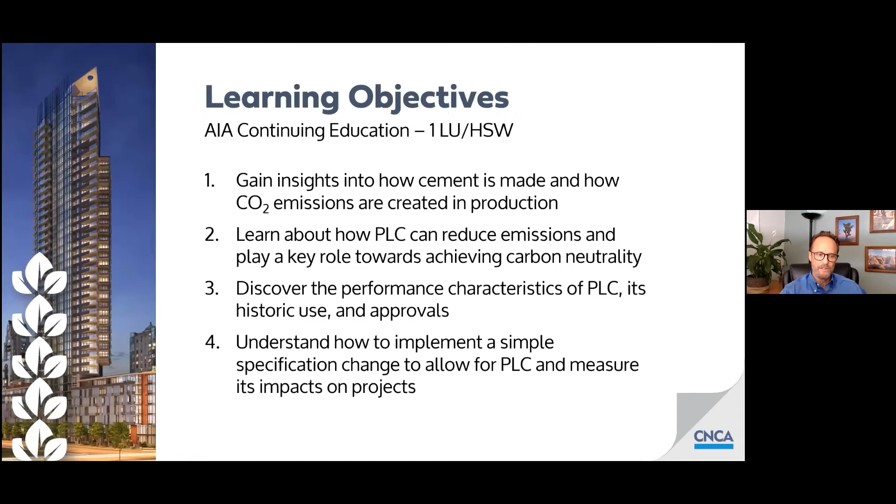Our learning objectives today were pretty well covered by Frank to start with. So we're going to go right into learning objective number 1. And this is where we'll get Nate started on how to gain insights into how cement is made and how CO2 emissions are created in production. Thank you very much, Tom.

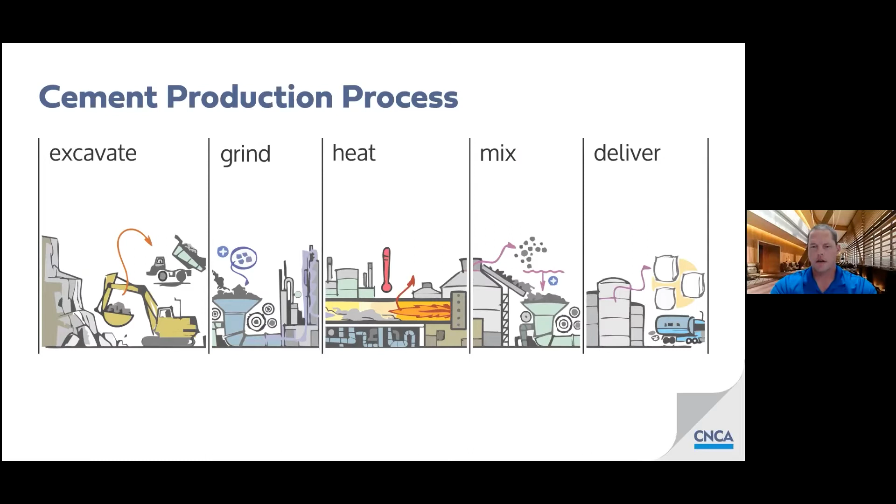What we have here is kind of a cartoon version of the production of cement, moving from left to right across the screen. We begin by excavating limestone, naturally occurring deposits in the earth, grinding that material up into a fine material, heating it up inside of a kiln to drive a chemical reaction that we'll look closer at, and then blending it with a few other ingredients at the end, and ultimately delivering it to customers for use, often in ready-mix concrete, but also in other applications, direct applications for cement.

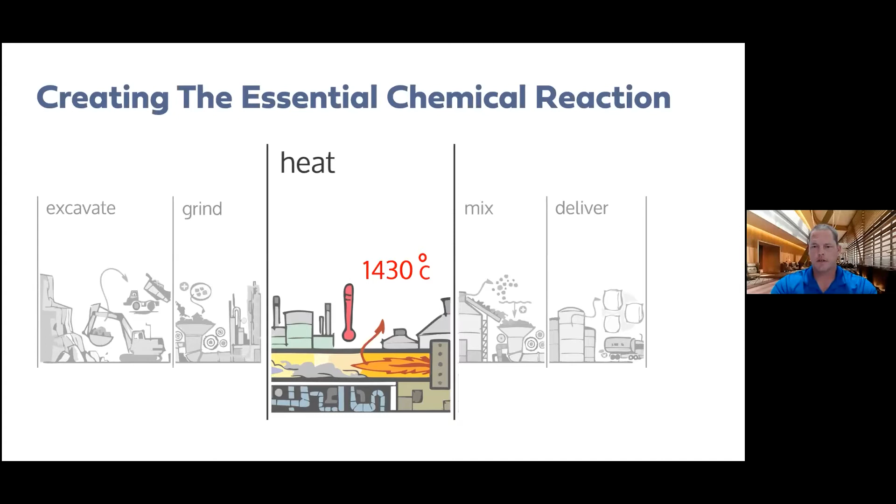This thermal process I want to focus on just for a moment, where we heat the limestone up to a relatively high temperature, 1430 degrees Celsius or 2650 degrees Fahrenheit. This takes place inside what we call a kiln, which is a steel tube about 8 feet in diameter and 150 or 200 feet long. And this is where a couple of important things happen.

You can see on the right side here, we've got a burner that's often fueled by petroleum products, natural gas, coal, petroleum coke, although increasingly agricultural waste and industrial waste products are going into that process to help us reduce our CO2.

The other thing that happens inside of a kiln is that the limestone material and a few other ingredients as well, iron and clay and things like this, get heated up in what's called a calcining reaction. That's where we take limestone or calcium carbonate, CaCO3 in the chemical equation at the top, and by heating it, we drive off carbon dioxide and we're left with calcium oxide, the prime constituent in cement, about 65% by weight. So that process, the chemical process, releases about 61% of the CO2 emissions that we associate with cement production. And the fuel, the burner, accounts for only 39% of the emissions.

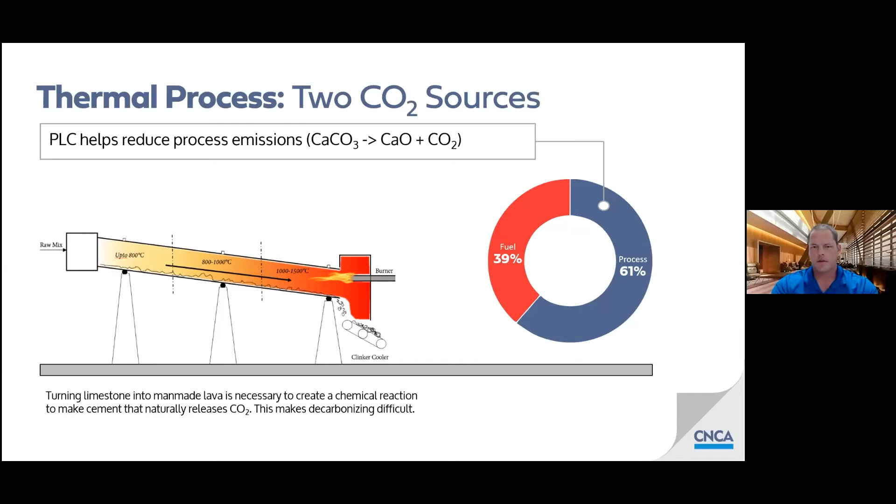So just wanted to set that record there so we all have an understanding of what we're talking about in this process.

After we make cement, typically for an architectural application, we mix it with water, with air, with fine and coarse aggregates to make concrete. And that's where the majority of the cement goes that gets made here in California.

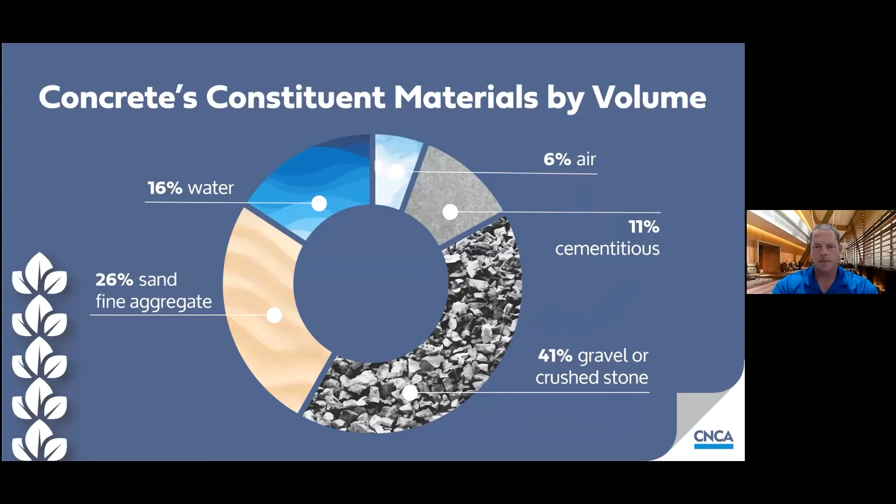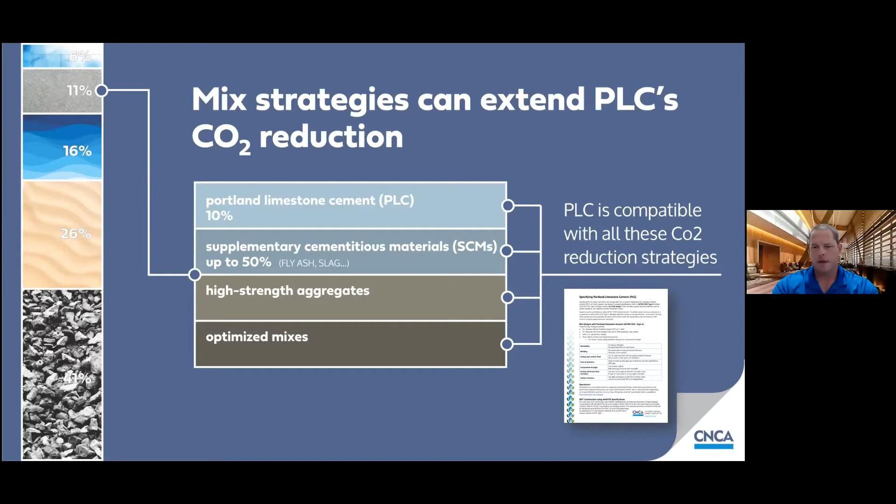When we make Portland limestone cement, we take that up roughly 11% by volume that concrete is. We combine it with the other ingredients that make concrete, but all of the practices and strategies we can use to reduce CO2 in our concrete mixes, like using supplementary cementitious materials like fly ash, slag, or natural pozzolans, using high strength aggregates that may be imported in some places, using higher strength concretes to optimize our mixes and reduce the total amount of concrete needed, all of those things still work with Portland limestone cement. We're just reducing the amount of carbon associated with the actual cement by about 10%, which then cascades into the concrete because the cement is responsible for about 85% of the CO2 emissions associated with concrete.

Here we have an example of a concrete mix design that was produced with ASTM C595 cement, which is Type IL, Portland limestone cement, the main topic of our discussion today. This one happens to be a Green Book mix. You can see by the designation, 565C3250P. What that stands for is 565 pounds of cement, a C, using their ABCDE system for aggregate gradation, 3,250 PSI compressive strength at 28 days, and the P means this is a pumpable mix. So what they've got here, just like the description says, is 565 pounds, in this case of Portland limestone cement.

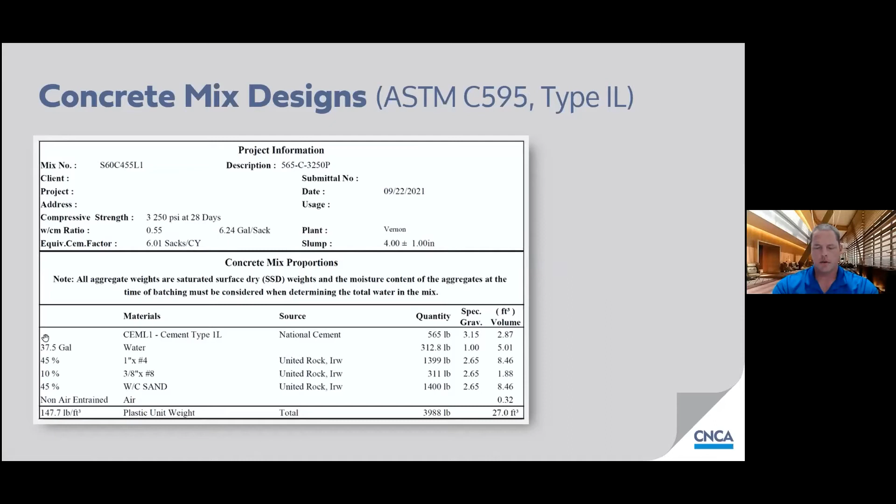To get this C gradation, they use 3 different sizes of rock: a 1 inch by number 4 blend, a 3/8 inch by number 8 blend, and washed concrete sand. And of course we have some water, we have some air. This particular mix doesn't have any supplementary cementitious materials in it, but it produces nice concrete, 3,250 PSI at 28 days, 4-inch slump. This kind of concrete mix is kind of the bread and butter of concrete producers in our area. I wouldn't describe it as particularly high performance other than by its use of Type IL or Portland limestone cement being a strategy, a tool used in this case to reduce the greenhouse gases for this particular concrete.

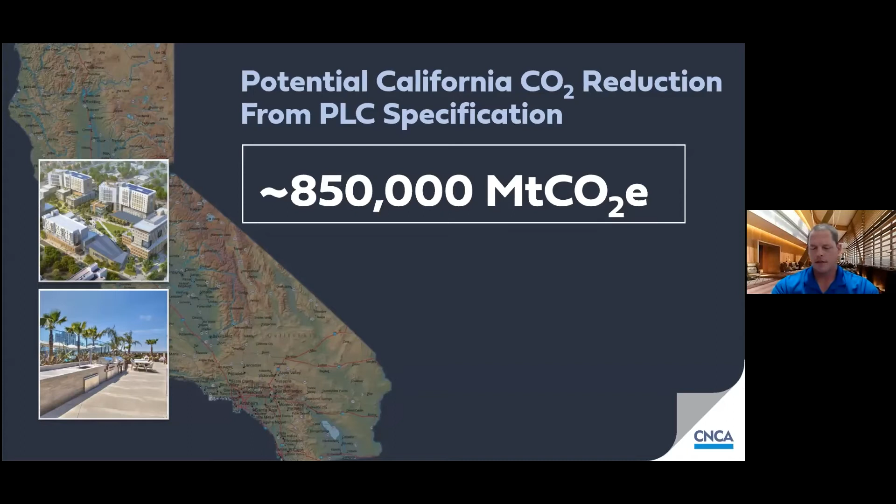If we can be successful in transforming our market from ordinary Portland cement to a Portland limestone cement, we could be potentially saving 850,000 metric tons of carbon dioxide equivalent per year in California. That is roughly equivalent to taking over 2 billion passenger vehicle miles driven every year off of the roads. That's the kind of order of magnitude we're talking about by affecting this change.

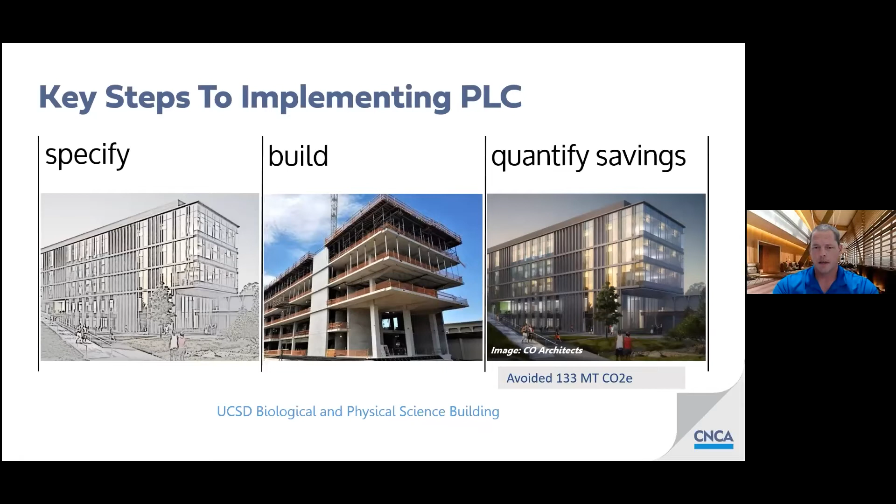Ultimately, what we want to be able to describe is how to specify this material, how to build with this material, and how to quantify the savings achieved with this material. Just like was done on this University of California, San Diego Biological and Physical Sciences building, where they saved 133 tons of carbon dioxide just by changing the cement that they specified. Up next for learning objective number 2, Tom's going to talk about reducing CO2 emissions.

Thank you, Nate. This is really where we start getting to the heart of the matter. If you think about concrete, it is a material that we trust our lives to every day. Think about being in the Bay Area as an example. If you're riding in the BART under the bay, if you're driving on a bridge over the bay, if you're looking at what's happening with foundations, particularly with things like liquefying soils for earthquakes, there's a lot of creative solutions happening there. Our entire water supply and treatment and flood control, all these things at some point relate to concrete. And like was mentioned earlier, it's used in so many places. Yet while it's so vital to our lives, there is an impact on embodied carbon that relates directly to the objectives that so many of you, I'm sure, are working for firms that are committed to Architecture 2030.

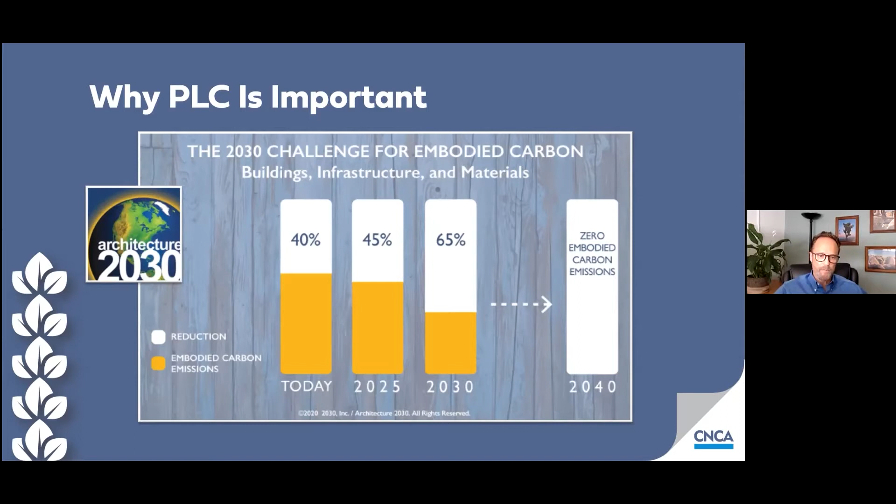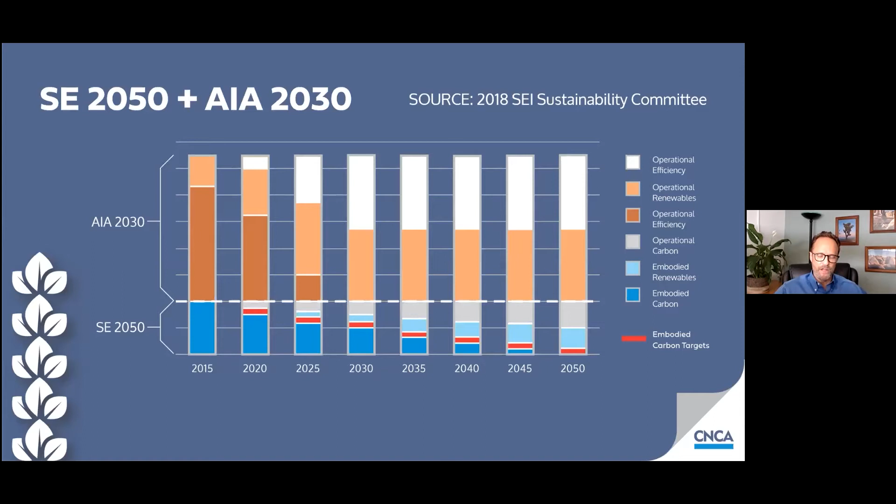You can see that the goals for reducing embodied carbon are getting bolder and more aggressive. This has also caught the attention of the structural engineers community, and we're encouraged to see that they are aligning with these goals. This chart shows how the AIA, Architecture 2030 and SE 2050 are working together to address these areas of operational and embodied carbon.

It's not just the built environment and architectural community that cares about this. The state of California is in the lead, as you'd expect. The state reached its goal of getting to 1990 levels of greenhouse gas emissions by 2020, and now by law is focusing on an aggressive goal to get to 40% below 1990 levels by 2030, with carbon neutrality and net negative starting after 2045.

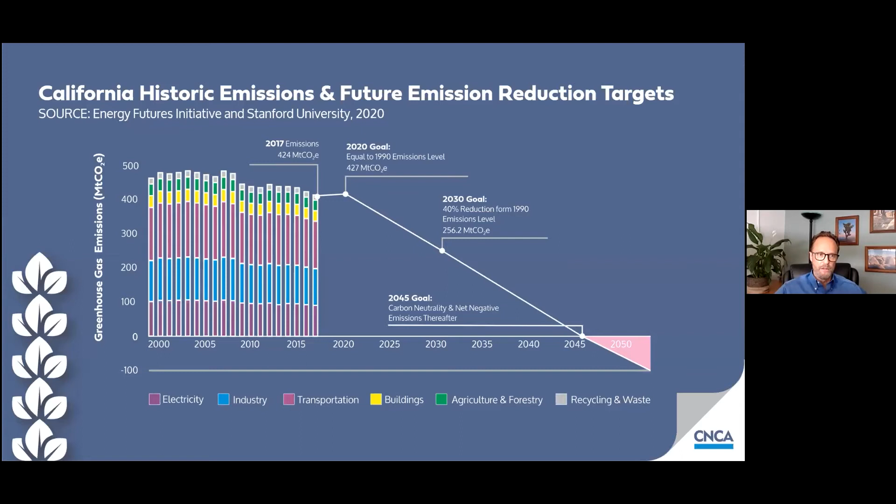We realize the cement industry is an important part of this. If we look at where we fit in terms of contributing greenhouse gas emissions in the state of California, you can see in the upper left-hand corner that the cement industry contributes 1.8% of the state's greenhouse gas emissions. That's why we're part of the California Air Resources Board's target industries for reductions. You may look at this chart and see buildings at 8.7%, and wonder about other materials we compete with, such as steel or timber.

Those materials are largely imported into the states, and even concrete. You don't see concrete on this list because, as Nate mentioned, about 85% of the CO2 impact is related specifically to cement. And that's where Portland Limestone Cement can start making a difference.

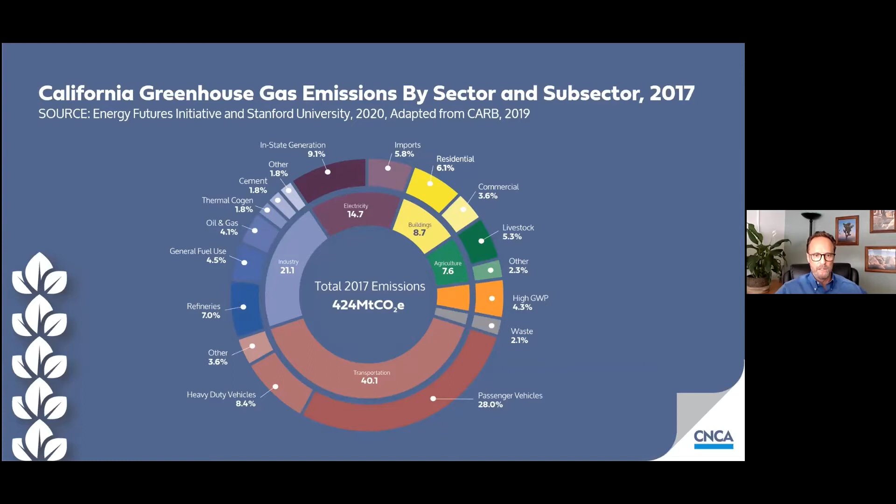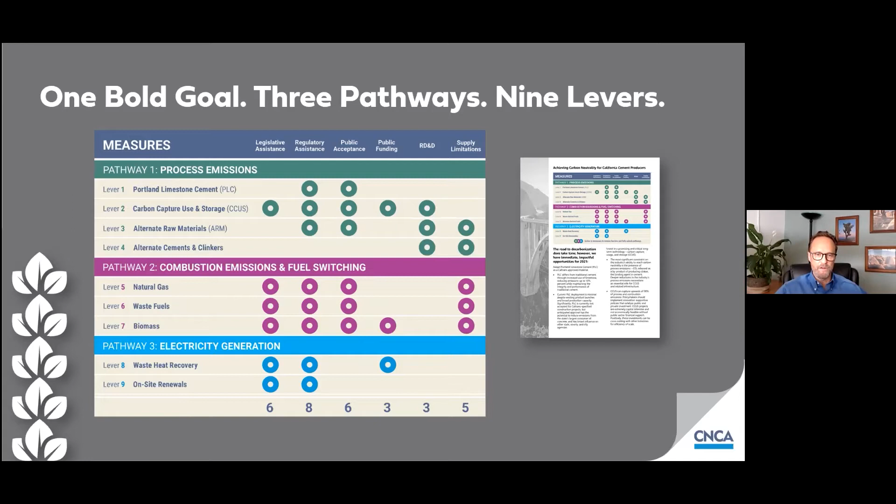This is, again, where you are a pivotal part of this progress. We really want to start a movement that's already begun, and accelerate as much as we can to move away from the traditional Portland cement typically specified on all your projects, and to inspire all of you to allow blended cements on future projects that include Portland Limestone Cement and others. This is a simple change, and I'll show you how to make it at the end of this presentation.

But a lot of this depends on demand. A cement manufacturer needs to respond to demand in order to change the way it creates its product. So this is, again, where you play a pivotal part.

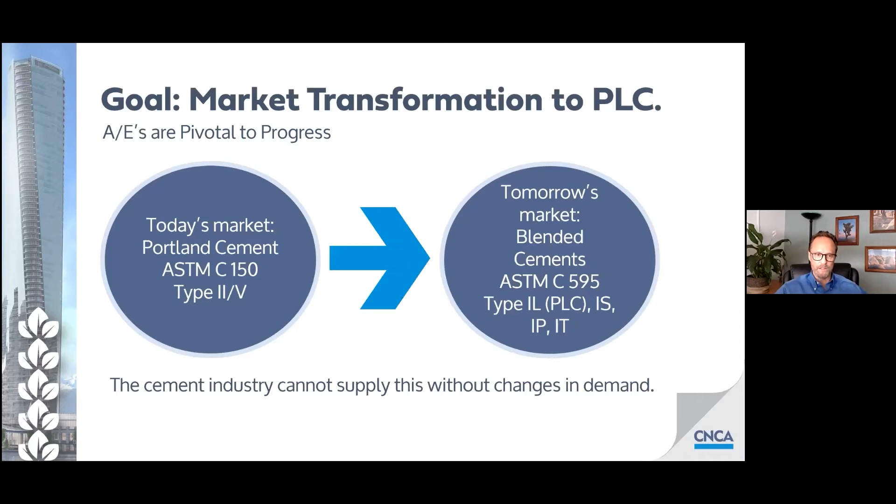I also wanted to mention something we're very proud of, and tip my hat to AIA California, because as I get your emails and look at your website, it's very apparent the chapter is closely aligned with looking at legislative issues. In this last legislative session, our association was very involved in shaping a landmark piece of legislation to decarbonize the cement industry. It's called SB 596, the first bill in any California sector to focus specifically on achieving net zero emissions. We're pleased that much of this aligns with our carbon neutrality plan.

Now this is where you get to put your seatbelt on and go back to school a little bit. This is where Nate will show you the sort of information he really gets into when talking to structural engineers. The majority of presentations we give like this are focused on structural engineers, because we realize how pivotal they are and how you look to them to make changes like this to the projects you're working on. So Nate, it's back to you. That's right, Tom.

We want to make sure that everybody has access to the information they need to make these decisions. When you, as a design professional, decide that there's a need and a willing owner to reduce greenhouse gases in their buildings, we want to make sure that the engineers you're working with know about this material and are comfortable with it, so you don't hit roadblocks when you go to implement it.

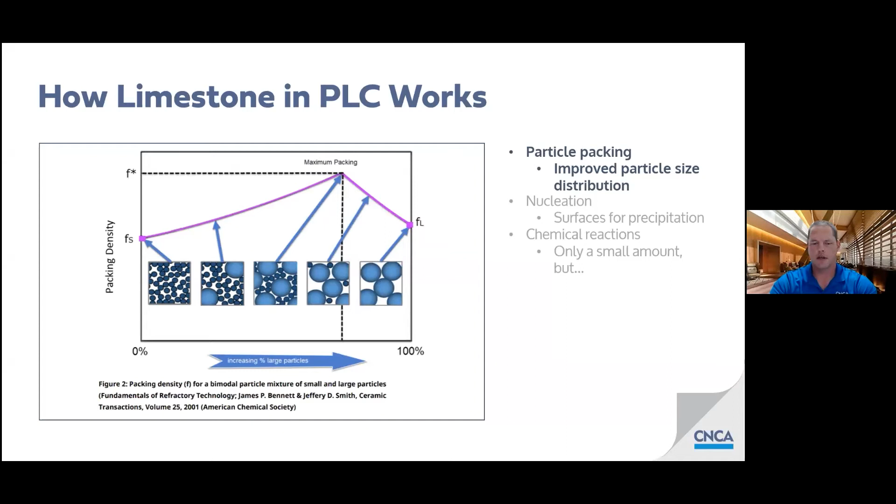Additionally, we create more nucleation sites for the formation of the calcium silicate hydrate crystals that are the product of the pozzolanic and hydraulic action of the cement. This enables the reaction to take place. It begins at more places, and the crystals don't have to bridge as far between cement grains because these limestone particles are in between them.

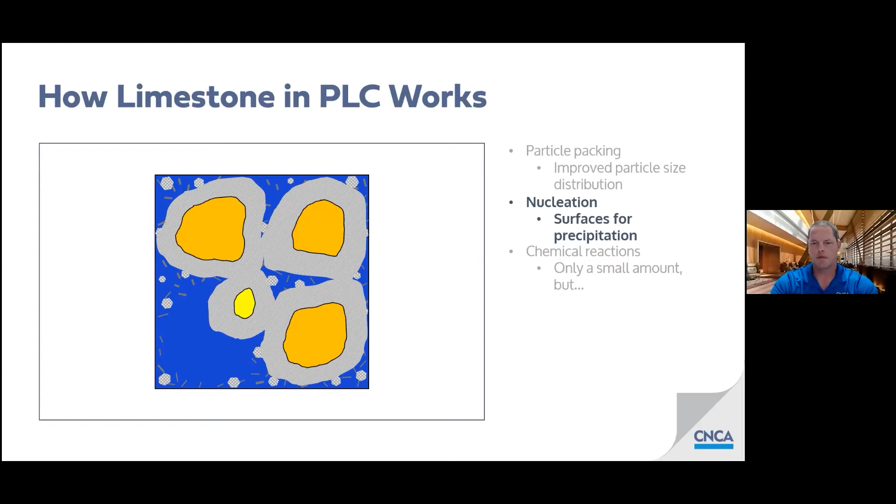And then finally, we have a chemical reaction that takes place, particularly when we have slag cement, and also in some instances with fly ash supplementary cementitious material, where we get a product called carboaluminates. As we'll see in some slides coming up, oftentimes the presence of these supplementary cementitious materials in beneficial harmony with Portland limestone cement results in concrete that's even stronger.

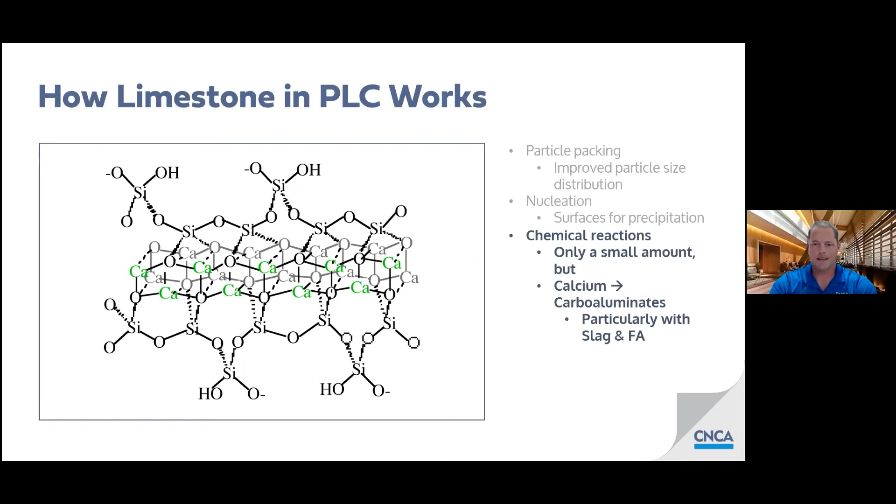We have a series of PDFs here that explain some of how this works and what to expect. As we're talking, Tom is going to upload a PDF into the chat window that you can download—about 4 or 5 pages of PDFs about Portland limestone cement.

But the general theme here is that this is being intentionally formulated to be a one-to-one replacement for ordinary Portland cement. You should not expect major changes in terms of workability, surface finishability, setting time, strength gain, compressive strength, freeze-thaw resistance, sulfate resistance, et cetera.

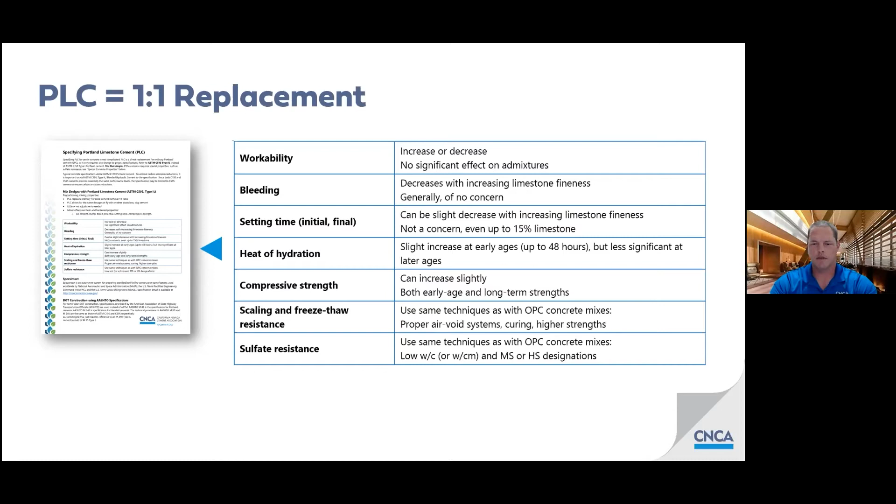We could go into great detail where I could pull out some really exciting graphs, charts, and quotes from different academic studies comparing ordinary Portland cement to Portland limestone cement in all of these properties. We can do that if you'd like, but we're not going to do that today. I'm only going to put up a few graphs comparing the two.

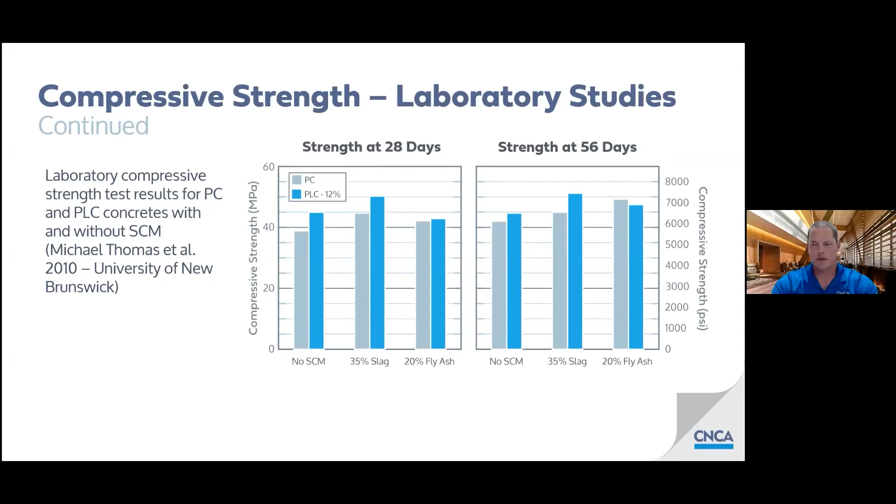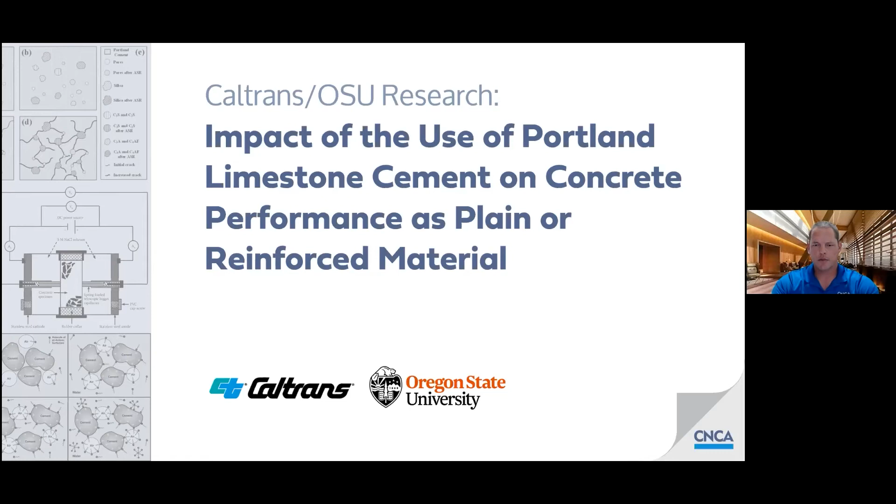More recently, Caltrans undertook an extensive research project in conjunction with Oregon State University to look at how the implementation of Portland limestone cement in Caltrans specifications would impact a lot of the work that they do. This was a pretty large project where they imported lots of materials from California—cements, Portland limestone cements, limestone powder, supplementary cementitious materials, aggregates, etc.

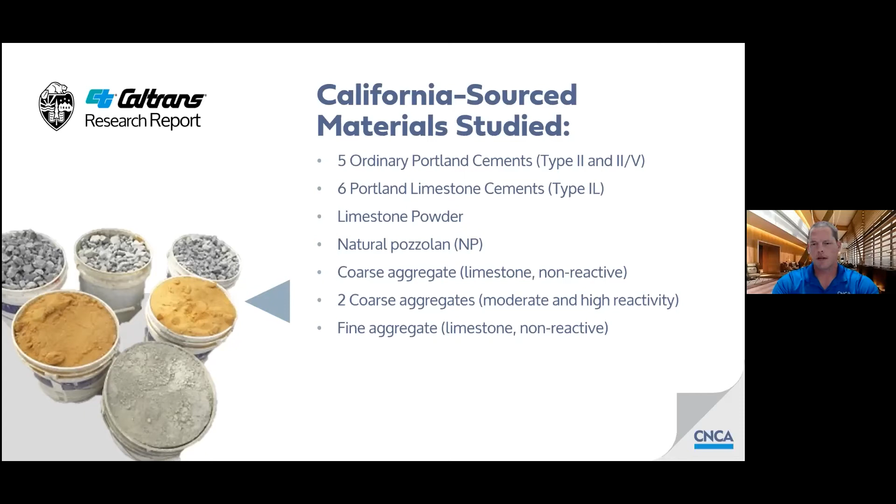All these materials were imported from California sources, made by California producers, and ultimately batched into concrete that would serve a Caltrans specific mix design for a pavement or for a structure, as an example. So this is very applicable, the information in this study, to what we're doing in California, both in public works type projects as well as buildings.

Many topics here were studied in particular in this study, 321 pages of excruciating academic detail on all of these various topics concerning the comparison of ordinary Portland cement and Portland limestone cement. We could talk about this study for hours. You could probably read it for days. It's certain to cure your insomnia, but I'd be happy to share it with anybody interested in reading it for themselves.

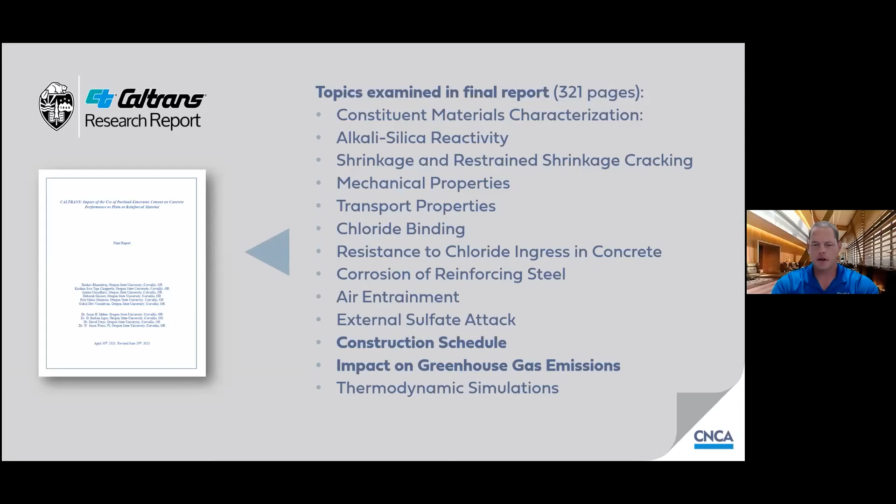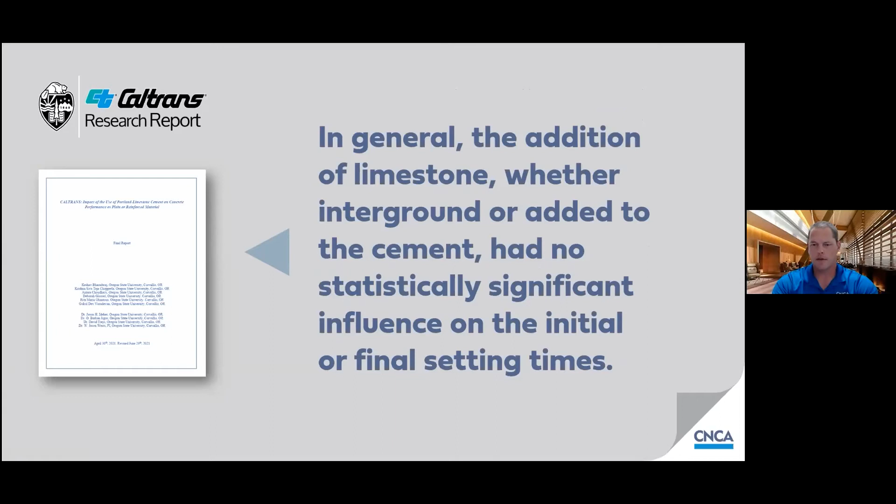A particular interest, I think, for our audience today, we wanted to touch on construction schedule and the impact on greenhouse gases. We have a couple of excerpts here from that portion of the study. This is a quote from the study: in general, the addition of limestone, whether interground or added to the cement, had no statistically significant influence on the initial or final setting times. So what that means is whether your concrete is ordinary Portland cement or Portland limestone cement, you would expect it to behave the same in terms of the timing of your construction.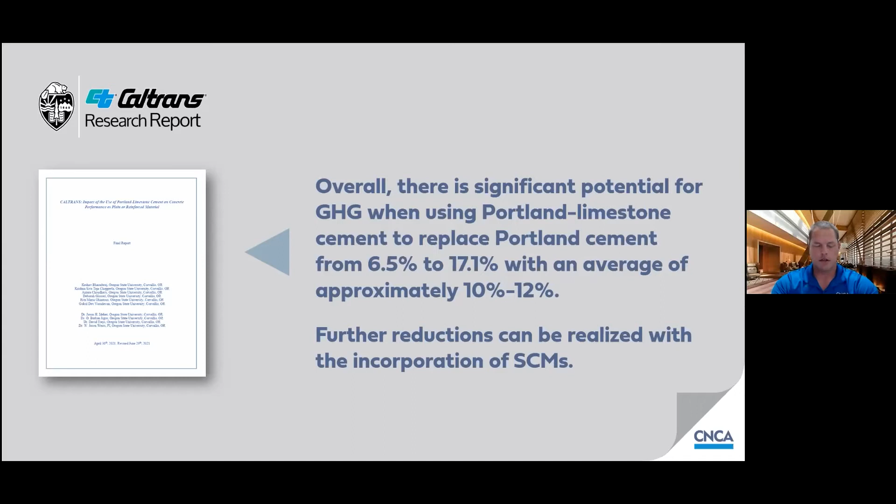Additionally, regarding greenhouse gases, this study found that the reduction in greenhouse gases from using Portland limestone cement could be between 6.5% and 17.1%, with an average of 10 to 12%. We're generally mentioning 10% - that's what we're seeing as probably the most likely scenario. But due to the synergies of this material with supplementary cementitious materials, like I mentioned earlier, there's a lot of opportunity here for further reduction by utilizing the tools we have available in terms of mix optimization and supplementary cementitious materials.

To that end, Caltrans is incorporating this material in their standard specifications. That standard spec is to be published on Friday, October 15th - two weeks and three days from now, if my math is right. At that point, it's going to be a standard material in the Caltrans revised standard specifications.

We have this slide up here that talks a little bit about PLC acceptance and adoption over time. This is to make the point that while Portland limestone cement is new to California, it's not a new material at all. It's been used in Europe for 5-6 decades now, in Canada for about 14 years, and in other states around the US for about 13-14 years now.

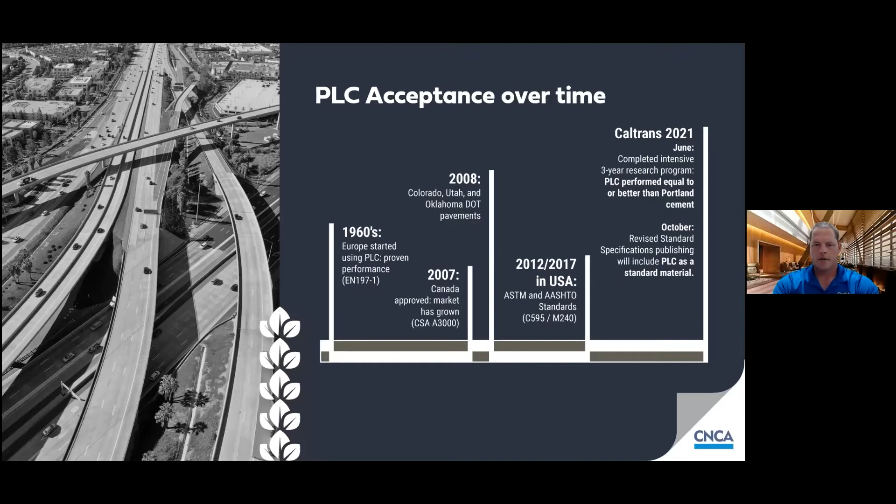To that end, there was a study done of about 800 lane miles that got paved in 3 states back in 2008. The National Concrete Pavement Technology Center from Iowa State University did a review of these pavements when they were 10 years old and found that they were performing very well.

The point of having this in here is that we want you to understand that under very harsh service conditions - you can imagine a pavement in Colorado getting de-icing chemicals on it, getting multiple freeze-thaw cycles, getting heavy trucks, getting studded tires, getting chained up vehicles driven on it for now 13 years - the pavement's behaving just great.

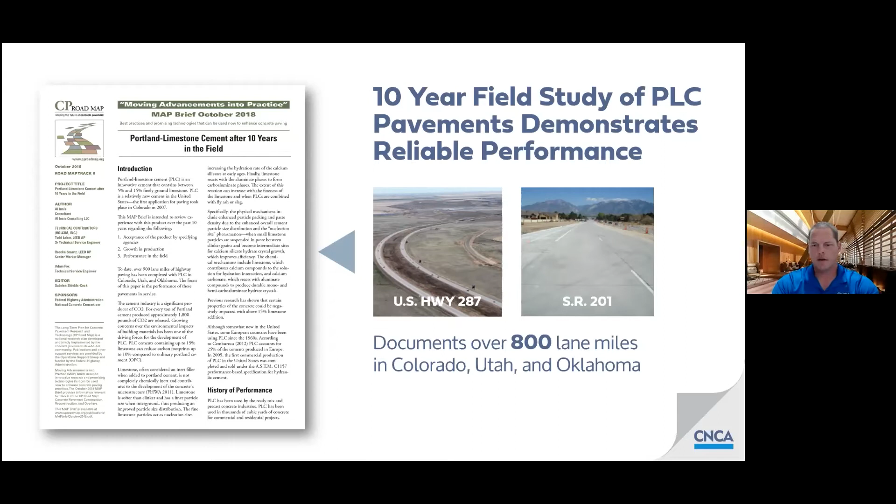Well, we also want to put some examples up here of some beautiful architecture, and Tom is going to walk us through these examples.

Thank you, Nate. Thought I'd show some examples of projects starting in Vancouver, British Columbia. You may have noticed in the previous graphic that Canada adopted Portland Limestone Cement as early as 2007. So this is an example of a market that has completely transformed to Portland Limestone Cement, as has the Seattle market. And that's, again, where we really hope to go with your help.

Here's an example of a project in Vancouver, what they've been able to do through the help of the Cement Association of Canada. They've been able to give us these examples, but also quantify the savings on these given projects. And I show these to you because we just think they're an impressive array of building types and structures. If you keep flipping through these, Nate, that would be helpful.

Here's an example of a hospital building where, in most cases, these are concrete structural frames, where they've been able to quantify both the amount of concrete used, the amount of Portland limestone cement that's been utilized as well, and the tons of greenhouse gas emissions that have been saved.

So these are big projects and impressive ones. You'll see here that what's easy to do as well, when you see a figure like 2750 tons of CO2 saved, we're going to show you how in your own office, or by contacting us, you can start using some of these comparative tools to show the equivalent number of cars removed from the road, or in this case, the number of acres of forest in a year that equates to that tonnage saved by just switching the type of cement used on a project like you've seen on these previous photos.

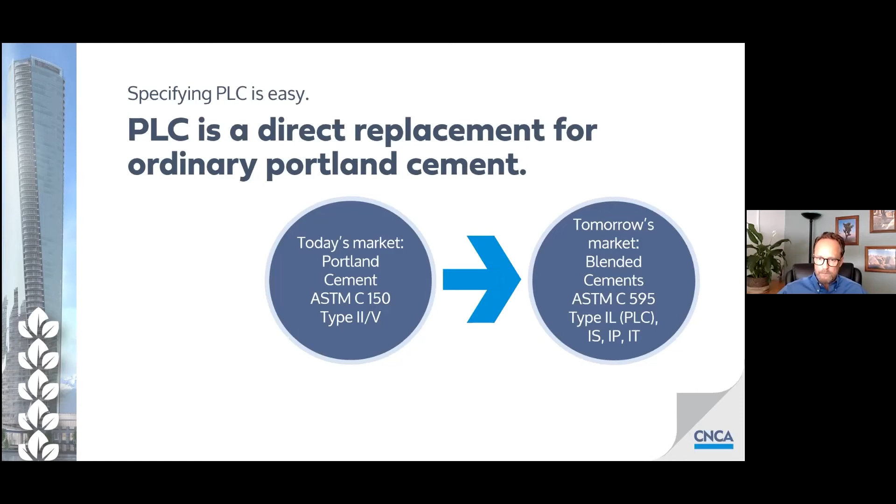Thank you, Tom. We mentioned this earlier, but at present, our market tends to be an ASTM C150 cement market. You're probably familiar with the terminology 2/5. Our goal is to drive this to a market that specifies ASTM C595 type 1L, which is also called Portland limestone cement. I put up this little cheat sheet here so we have an understanding of the different types of cement that are available under each of these two ASTMs.

I mentioned we're probably most familiar with the C150 type 2, which is for moderate sulfate resistance, and the type 5, which is for high sulfate resistance. And those have very, very close analogs in ASTM C595. Instead of being a type 2 or a type 5, we would call that a moderate sulfate resistance or a high sulfate resistance. Looks like we've got our arrows pointed in the wrong place here, but we would use the terminology MS and HS for this. The reason that those are such close analogs is that the product that comes out of the kiln is exactly the same product. It's just blended a little bit differently in its final stages of production.

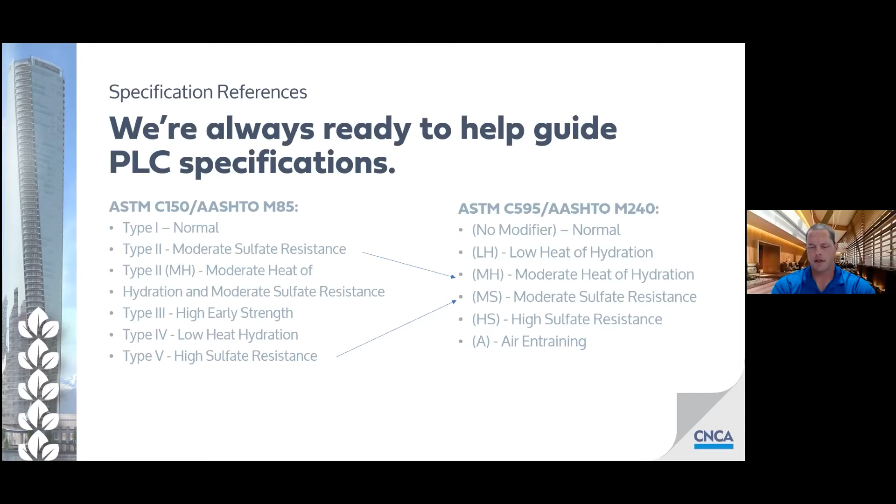We mentioned earlier specification guidelines. These should be in the PDF that's in the chat if you want to download it and take a look at how to specify it. It's already in several spec documents you may be using, like the AIA MasterSpec and Federal Aviation Administration specifications.

We'll take a look at specs in just a second, as well as some documents you're probably familiar with, ACI 301 specs for structural concrete, and ACI 318 building code requirements for structural concrete. These already include references to ASTM C595 type 1L.

We have an interesting example here from the Indianapolis Airport Authority. They're reconstructing a runway - bids are closed, but I'm not sure they've awarded the project yet. It's very interesting that in their specifications, they're only allowing Portland limestone cement. This is the exact language from their specification, following the Federal Aviation Administration format, in section P501 for concrete pavements, 501-2.2: cement shall conform to the requirements of ASTM C595 type 1L.

So very interesting that Indianapolis is leading the way in specifying a modern low carbon cement. We would very much like to see this sort of thing being specified in California, and are working with people to this end - people like yourselves.

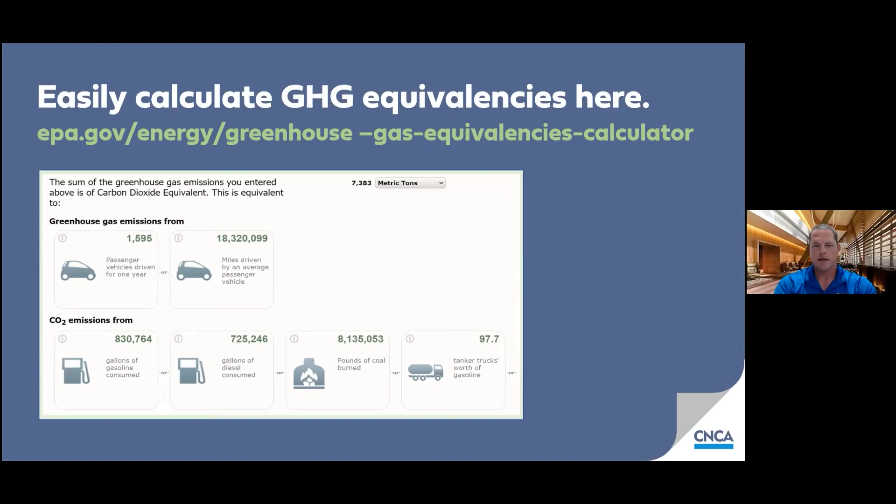Also want to draw your attention to some interesting information that came out of COP26, which is the latest report from the Intergovernmental Panel on Climate Change. They have for the first time recognized that concrete is a carbon sink.

They also had some interesting findings on the total impact of cement production in the world. You would probably see mentions of numbers like 6, 7, or 8% of the CO2 emissions in the world. This report found that number was closer to 4%.

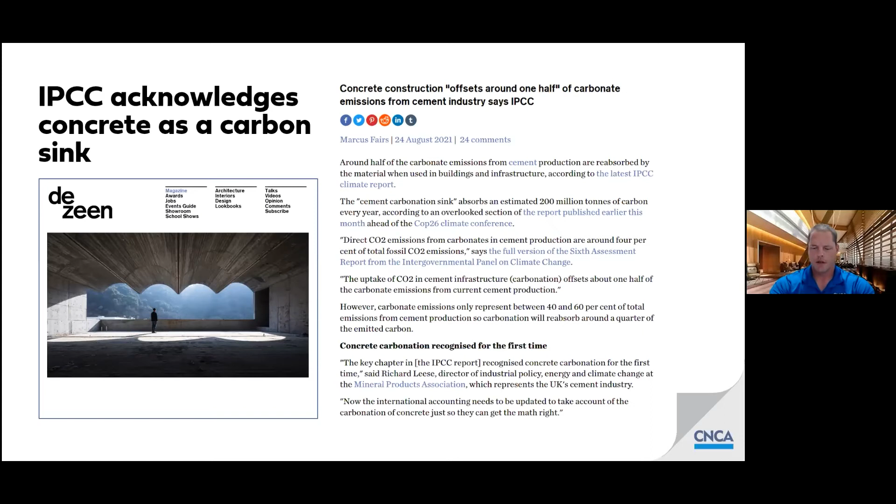So interesting information. Finally, we wanted to touch on some frequently asked questions here. These always come up, and I haven't been looking at the chat or question and answer boxes, but I suspect some things like this are probably being asked already, so we'll go ahead and mention them. As far as the color of Portland limestone cement, you should expect it to be roughly the same as ordinary Portland cement.

It may be a little bit lighter, but basically undetectable in place. I want to caveat that by saying one of our members, CalPortland, does sell a light colored product called Advancement LT, a light colored or white product that's also a Portland limestone cement. That particular product is much lighter, but it's lighter by virtue of being a white cement, not by virtue of being a Portland limestone cement.

Additionally, in terms of cost, our members are not positioning Portland limestone cement as any kind of cost premium. The cost is right on par with ordinary Portland cement. So this is not a premium product. It shouldn't require any special handling or special proportioning. We saw that it was a one-for-one replacement in terms of performance in the concrete, so you shouldn't really expect any differences there.

I will again caveat that in terms of that white cement, Advancement LT, as a white architectural product, that material is a cost premium. But again, it's a premium because it's a white cement, not because it's a Portland limestone cement. That same member, CalPortland, also produces a Portland limestone cement called Advancement HS. You may recall that HS stands for high sulfate resistance, and that is the product that's right on par cost-wise with their ordinary Portland cement.